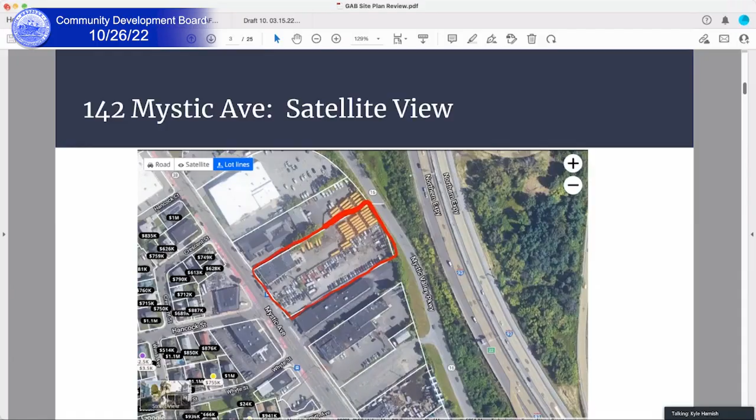This is the view from the rear, coming from 93. You can see the rectangle marking the perimeter of the lot. That building in front, the auto body shop, will be torn down and the rest of the lot will be cleared. As you can see, the lot is fairly level. In the back there you can see the school bus storage.

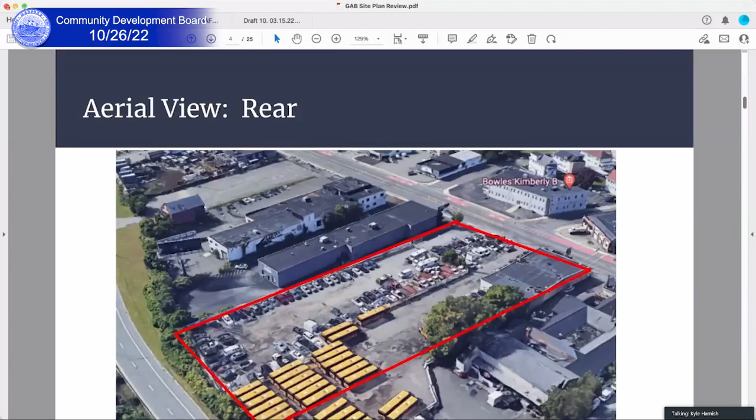From the front, this is the Mystic Ave view - again, very industrial, mainly car storage. Standing on Mystic Avenue, this front side elevation is what you're staring at day-to-day. It looks very industrial.

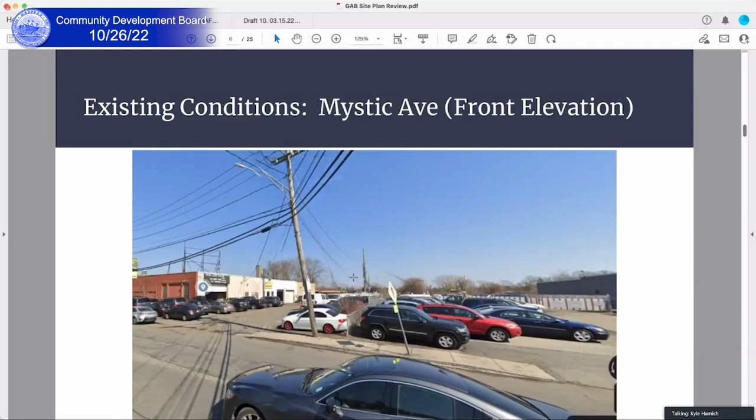You have that giant telephone pole in the way - not very exciting, not very inviting. Here's another view further up the street, looking back at the property. Again, very industrial, nothing inviting about this space. Certainly not a place I'd like to gather at night.

The whole genesis of this project is: how can we improve Mystic Avenue? Brian's had this vision from the beginning of what Mystic Ave could potentially be. It's a scary thought for our team and the individuals invested in this to be the first domino to fall, so to speak. We poured a lot of heart and energy into seeing this project beautify Mystic Avenue and be a catalyst for future development.

This is where we see the biggest change. On the left you see the existing site, and on the right the proposed one - obviously a dramatic change, much more inviting. I don't want to get too married to this exact image; it is a concept image. We're in development and our budgets are limited. We have a group of individuals who've committed their own capital and are very invested, but our budgets have limitations, so the renderings aren't exactly what they might be.

Those details will get fleshed out later in the design, build, and permitting phase of this project. But to give you an idea of the dramatic change we see happening on this specific parcel, this is meant to show you that.

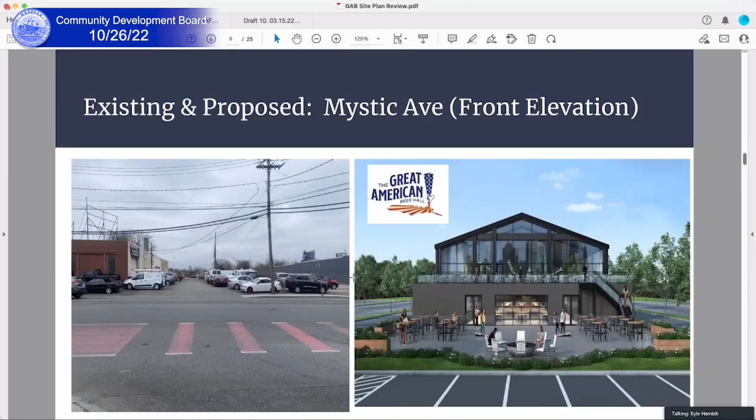Here's a more enlarged view of the front side elevation coming off Mystic Ave. The cars are gone, the bus is gone, the old dilapidated building is gone, and in its place a much more inviting social space that we think can be the hub for Mystic Ave and hopefully, as mentioned, spur future development on the street.

The front side elevation for us has to be inviting - it has to have some green space. We heard you loud and clear at the last meeting and have done our best to increase the landscaped area of this lot. We want the experience here to not feel like you're on an industrial lot, but rather like people are escaping into this development and building. It should be an experience for visitors and customers alike, and a buffer of landscaping and inviting nature toward the building will accomplish that.

Now, this is the side view. I know it's drawn some concerns from board members, and I understand that because of the massing of the project, it looks very large. We have windows along the top part here and a roof deck, which is nice. There's a lot of surface area on the lower half without much glazing, because a lot of our concessions are located on that wall, so there's really no use for windows there.

Don't want people peeking in behind the bars and behind the concession stands and whatnot. But we do have plans and ideas that we've shared with our architect already to perhaps grow some sort of green wall here, planting wall, some sort of signage to beautify that front entrance and space and make it more welcoming, and also to direct traffic to our main entrance.

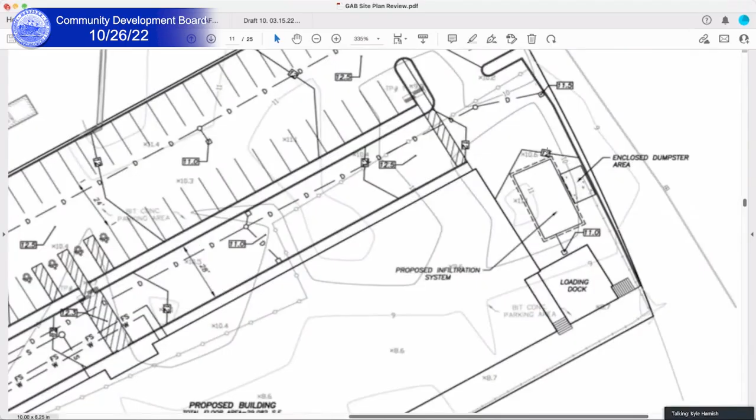At the rear, almost facing 93, you have grade 12. So that's elevation 12 at the rear. And if we look at the front, which is on Mystic Ave coming in, you have a 10 coming off the curb, and then you're up to an 11. So you're talking a 1 to 2 foot pitch over 400 feet, a very level lot. Certainly something that, as a builder, I love to see. Not a tremendous amount of challenges in a level lot.

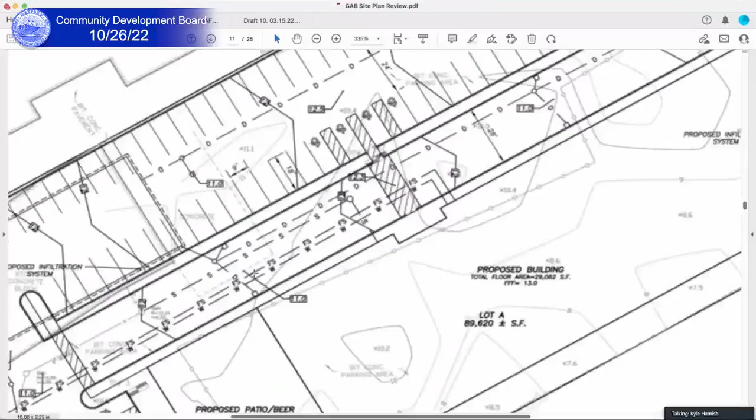Sorry, I don't know why it did that. Let me go back. Forgive me, sorry, trying to go back to that. There we go.

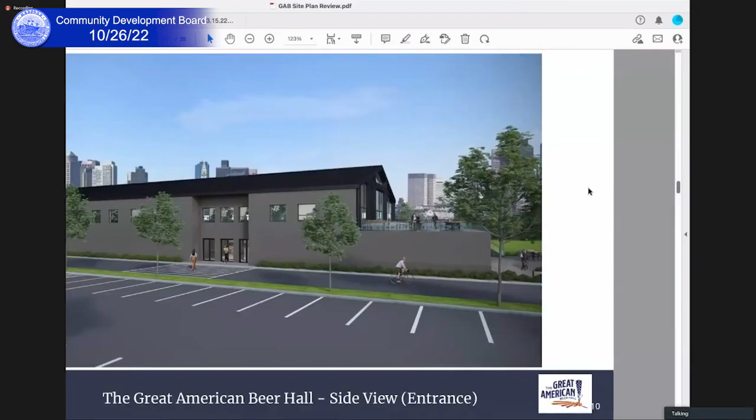So a couple things with the site plan that you'll see here that you won't see on our landscape plan: these dotted lines at the front of the parking lot. That's a proposed infiltration system, essentially a stormwater management system. This is where our drainage will go. So the parking lot, you'll see, is at 12 and a half at the top, goes down to 11, and then pitches all the way down. You essentially send all the water down to this infiltration system here.

And then there's another infiltration system in the back by the loading dock, and that is to send the water down this way. So those are our stormwater management systems that have been looked at and are being worked out with our civil engineering team and the City of Medford Engineering Department. We will get calcs on all that, but it's basically the surface area that is out there and how much water management we need to calculate. So that hopefully answers questions on whether or not the lot is level.

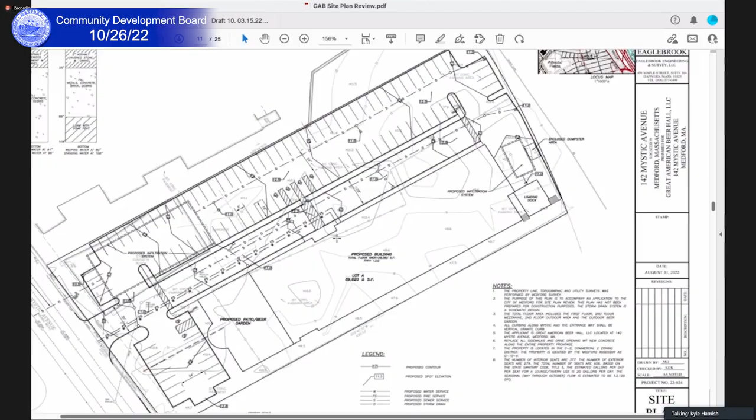It certainly is. You can also see here the utilities coming off Mystic Ave, outlined here, that go into our buildings—gas, water, sewer, drain, and underground electric. It is our intention to get everything underground. There is an electric pole at the front of this property right on Mystic Ave that is owned by the utility company, and we will do everything in our power to hopefully get that pole removed and get a transformer put somewhere on the landscape buffer area. No guarantees there, but it's something I am looking into, and hopefully can get either Eversource, National Grid, whoever manages and maintains that pole, to work with us so that all the utilities are underground. I just think it makes for better development, and you don't have to stare at a pole right in front of the building. So that's the site overall.

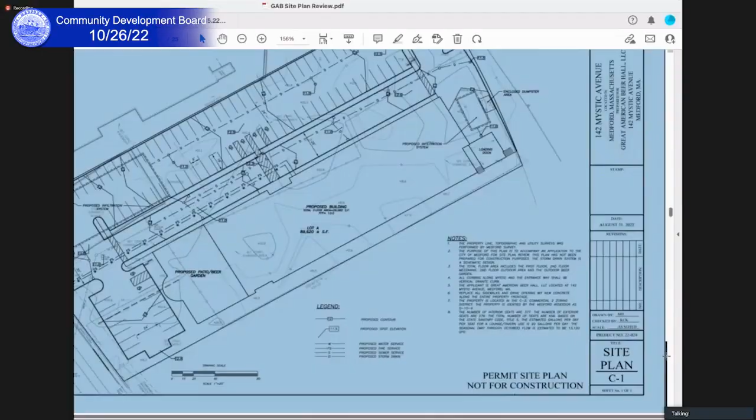Now I'll get into the revised plan here. Backed me out of this. Okay, so, sorry. You had it there for a second. Yeah, I don't know why it's not letting me scroll as it once was. Let me try to enlarge it for you. Forgive me if I'm taking extra time.

Okay, so here is the revised landscape plan, and I worked on this basically to answer most of the questions that were brought about in the last preliminary hearing, and also upon receiving all the letters from the Medford Fire Department, the Public Works Department, the Engineering Department, and the Traffic Department. So we worked on this pretty diligently, and forgive us, we do have budget constraints—this isn't some high level architectural rendering.

So we're doing the best we can, but when it comes to the actual permitting phase, you'll get much better and clearer images and renderings. But I think it still communicates our message and hopefully highlights some of the areas of concern.

Everything was designed here per city ordinance 6.3, which was provided by the planning department office. Alicia and Victor were kind enough to send me some of that information, and I reviewed it to the best of my ability and included all those measures here.

So just to give you an overall idea of the lot size and how much we're covering, I wanted to show you this legend for the zoning requirements. This is commercial C2, and basically what's required of us is 35 feet of frontage.

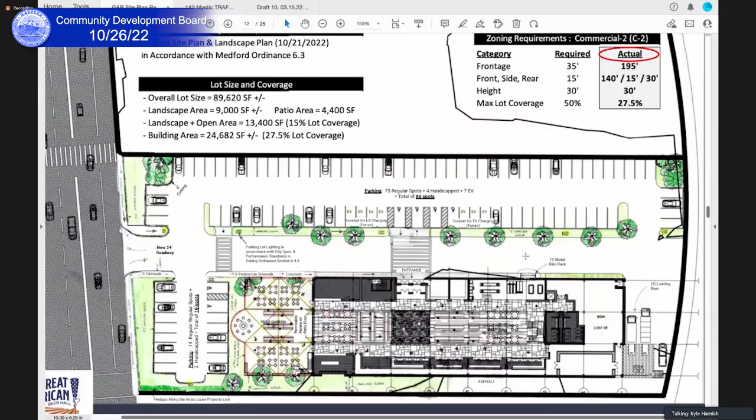Bike rack was mentioned at the last meeting. We have a 15-foot metal bike rack included at the front side of the building over here. We put it further back on the property just to hopefully deter any theft or anything like that.

We also have 2 loading bays at the back of the property that was brought about by one of the departments. And then we've clearly identified our entrances. We've opened up our landscape buffer area to show the flow of traffic going to the parking lots and how those concrete sidewalks are going to work.

So I think overall, that is essentially the changes that were made on our behalf, and hopefully answering a lot of the questions and concerns from the board on the last meeting, and certainly all the letters we received from the various departments. One thing I want to bring attention to from one of the departments was the traffic department. We understand that the traffic study that was provided is lacking in some areas, and the traffic department director suggested some mitigation efforts to help us get where we need to be.

I think our team is committed to doing our best effort in working with the town and the city to achieve those mitigation efforts. He provided essentially 2 pathways.

Not sure if everybody read the report, but the first of which, mitigation efforts are mainly using Mass DOT, because that road, Mystic Ave, is a Mass DOT road. So we would have to engage with them and offer some ideas in mitigating the traffic flow to our site.

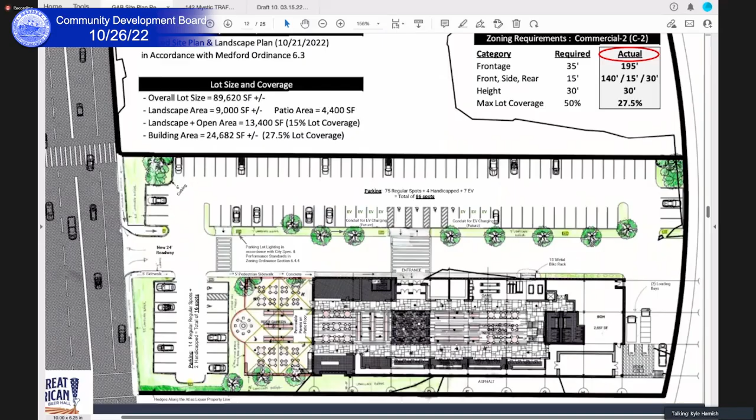Other than that, I don't see anything that came about from the various boards or departments that we are not able to answer or flush out, either in this meeting or regarding the stormwater questions that came from the engineering office. Those are all being worked on by our civil engineering team. And obviously, when we go for permitting, stormwater permits are required, so we won't be able to do anything without those permits in place, irregardless. So I think we've sufficiently answered most of those questions.

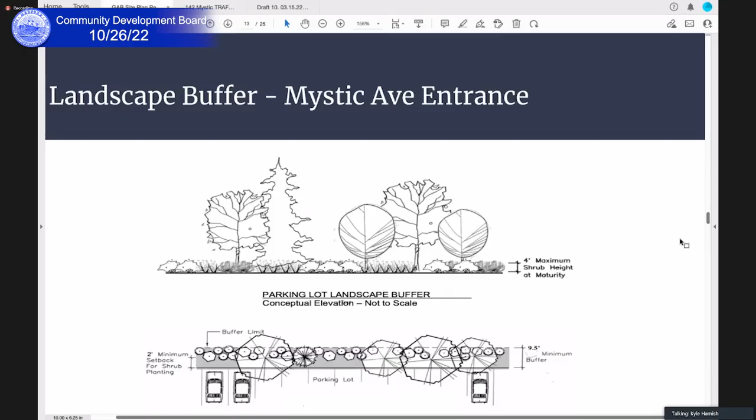Let's go to the next slide here.

Okay, so again, this is your front view. What I want to talk about next is the overall design and aesthetic of this building. I hope the board understands this - like I've mentioned several times before, there are budget constraints in this project. We've already done a lot and paid a lot of money to get to this point, and without knowing that we're actually going to build this thing, it's hard to commit more capital to have the full architectural plan done. So at this point, this is the best that I think we can provide to the board to give you an idea of what we're trying to build.

I have some slides to show you some metal prefab buildings that I think are successful and how they've been built in other areas of the country - good examples of what we're trying to do. A key factor to our building is the prefab metal. The reason for that is twofold. One, cost - keep our costs down. Two, speed - we want to open this as soon as possible, and we are committed to doing so. The big reason is construction costs are constantly fluctuating. Since the pandemic, in this field and industry, it's been very difficult to gauge pricing, and almost everything you put out to bid comes back over budget. So you're constantly trying to value engineer and source materials from different areas. So something that might be visual to you today on this board might not be available to us - we're just trying to give you a concept image of what we're trying to achieve. I think the other buildings I show you will be helpful in gaining perspective of where we're coming from.

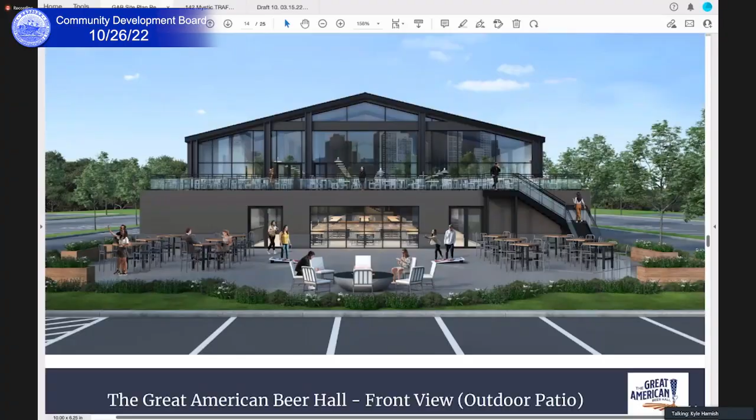Why don't I go back? Sorry - let me go down to the other view.

Why does it keep going back to that? Sorry.

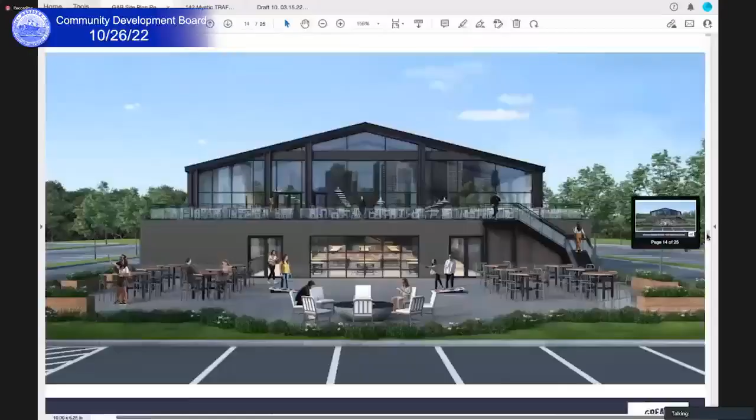So this is the building. Again, low pitched roof. You can see they have solar on top, which we intend to do. HVAC mechanicals are on top. They obviously have some outside dining. They're on a main road.

If you look at more recent images of this property, they have this landscape buffer here. It's very narrow. Ours is bigger, but these have grown into some vines, and so they've shielded some of that metal, corrugated metal paneling with some landscape screens, which I think is a real nice detail. They have some plantings in the front. This just shows you a real world example.

I'll give you one more. This is Surly Brewing, a metal prefab building. Again, look at the roof pitch, very similar to ours. This has some second floor mezzanine, obviously some indoor outdoor feel, and a fire pit in the front.

This is essentially trying to give you some idea of our job to create an experience for our customers. I think that indoor outdoor feel is going to be instrumental in our success, so any areas we can do that, we're going to. Mainly our strong point is on the Mystic Ave elevation and that front beer garden. We're going to do the best we can to keep it open, keep it airy.

Obviously, being in New England, we have challenges with weather, so a good part of the year we won't be open out there. But it's in our best interest to introduce as much glass as possible and create that flow indoor and outdoor. So those are three real world examples of metal prefab buildings.

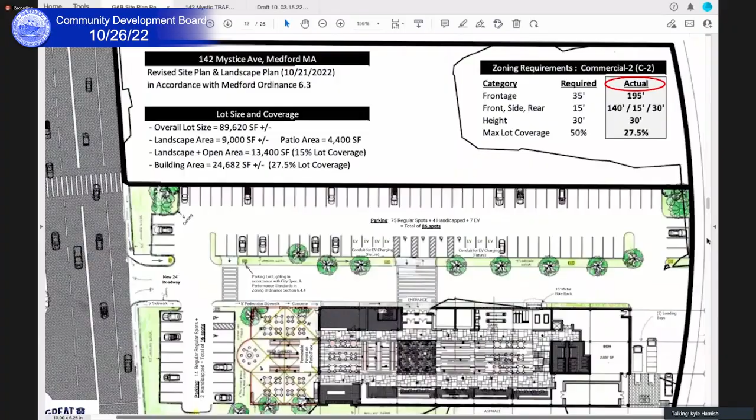This is just to give you an indication of what the inside is going to be. Large gathering spaces down the center of the beer hall, concessions on the outside, beer garden at the front, and then additional taps on the other side of the building, and bathrooms at the rear.

And then we're going to have some form of second floor mezzanine, great for private events and maybe some offices, ADA accessible bathrooms. We have an elevator and then a roof deck off the front.

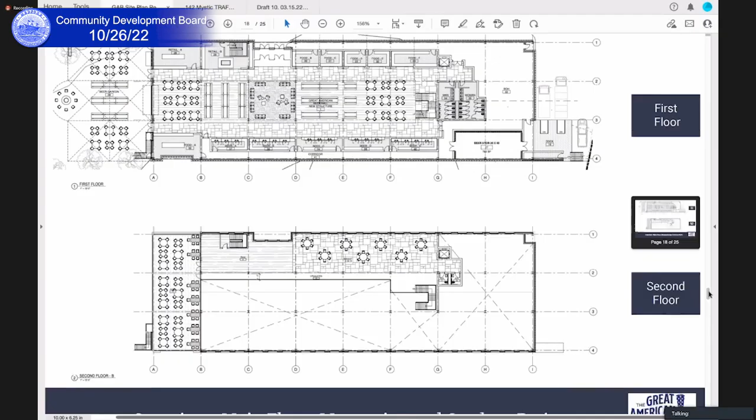It's just to show you that people are congregated in a social setting in the middle of this building with a lot of glass, trying to feel escaped from the city and the hustle and bustle of Mystic Ave. The idea is to create an environment inviting inside as well as outside.

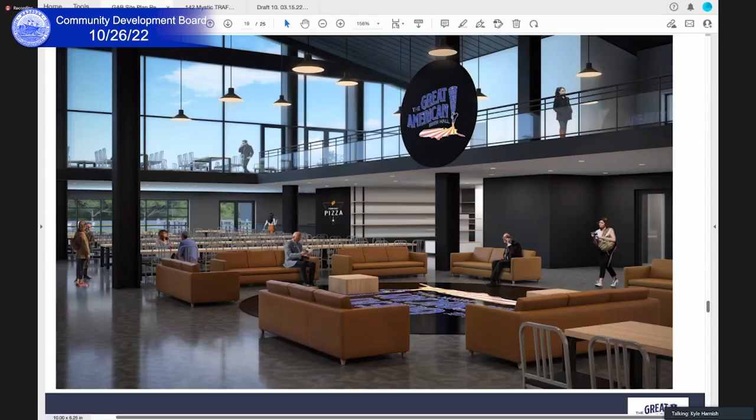Show you another view. This just shows you some of the beer vending stations down below. This is looking up from the mezzanine level, some form of television for sporting events, things of that nature. And one last view just shows you some seating.

This is not the set of chairs we particularly have or the tables. It's just to give you this communal aspect of bringing people together. That's kind of what our motto is, best brought together, and we feel that this beer hall can certainly achieve that. We're doing the best we can to make it an inviting space that people want to gather both inside and out.

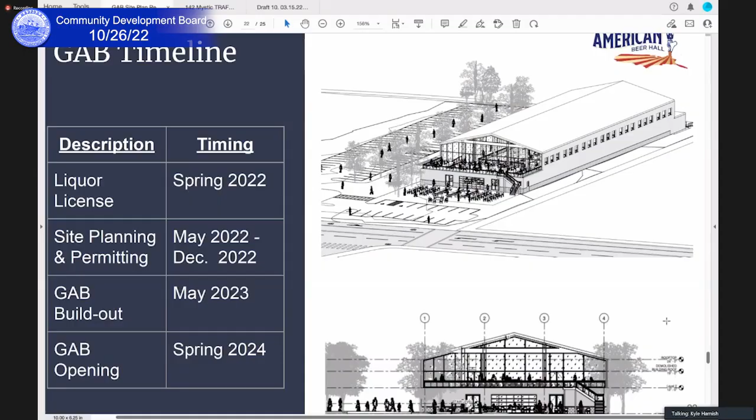So to wrap this up, I wanted to give you a timeline on where we're at and how this project has come to date. We've applied for our liquor license, so we're still awaiting that. Site planning and permitting, we hope to get through as soon as possible.

There are time constraints, not only on our capital. We are being funded by Capital One through an SBA loan, and we have capital requirements and commitments that have certain deadlines to them. We are running low on that timeline, and I think Brian has clearly communicated it from the beginning.

His family, who owns and manages the property, they have tenants and need to give them forewarning, and there are leases and things of that nature coming up to expire. So it is certainly a critical path for us. We are at that juncture right now and need to move things along as best as possible. Our team is committed to doing it. We just hope the board sees it the same way in assisting us—we understand there are multiple steps still to be had.

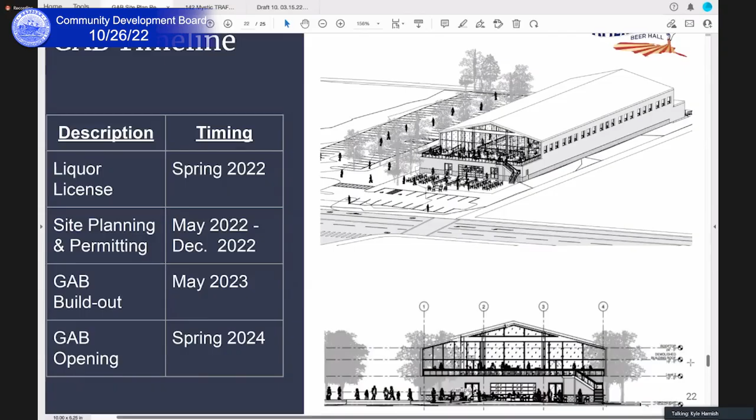But this is one critical and important step that can get us on the right path. Again, I mentioned time, speed. The metal prefab buildings, we can move fast, and it is in our intention completely to move fast. So if we can get swift approvals and permitting going as soon as possible, we will intend to build in the spring, in May of 2023, and hopefully have one year of building and be open by spring 2024. So that's what our team is committed to. And I hope with the help of this board that you guys will see it the same way as we do, and doing everything we can to improve Mystic Ave and make it a place for people to want to be, and hopefully spur future development on this street.

So I'm open to any questions from anybody. I hope I didn't take too much of your time. No, we appreciate the presentation, Mr. Harnish. Appreciate that very much.

Thanks for the additional details and materials you provided to us. Let me, just following our regular agenda, invite any city staff who might be here who would like to speak or address the project before we go further. Amanda, any folks out there? No one from that I know of, unless Victor or Alicia have something they want to add at this time. And they don't have to. Just an invite. Thank you.

I think it would be good to hear from the board. We have been working with the applicant to try and make sure that they could respond to everything that the city is looking for in a presentation like this. We're excited to be working with a smaller company and local residents, and not a large international firm that's coming in and putting this in Medford, but rather somebody who's from the community trying to develop something for the community. And I just want to acknowledge that, because I know they keep saying like on a shoestring, tight, but that is, we're working with community members here to develop something for the community, which does in fact have a lower level of initial investment than some of the larger projects that have come before you recently. And we thank them for having extra meetings with us as well.

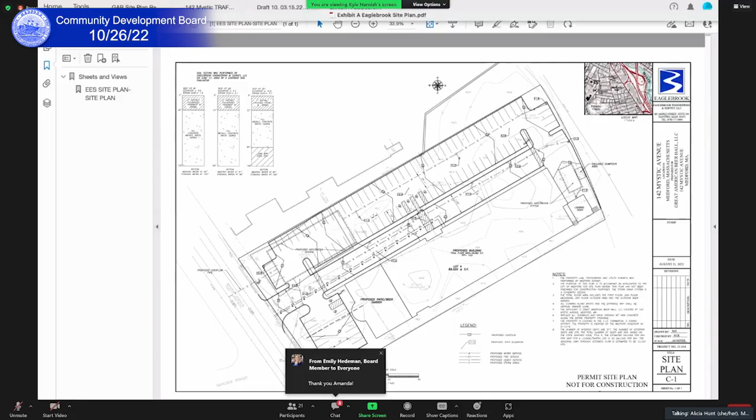Actually, the part about a site plan prepared by a registered architect or professional engineer is that document with the elevations and everything, the easements, the right-of-ways, existing contours. That's 11.7.7 of the document. I see that, thank you.

Lighting, they then actually supplemented that, and some of those items on here, landscape and screening, is on the additional document they prepared, the one that's colored in.

And I believe they provided a written list in the packet. There is... I'm going back and... a list of site plan updates.

That list was provided to you in writing. And so it is extremely simple to say that the list of site plan updates in the letter dated October 21st, 2022 would be incorporated as each of these is a condition. Before a building permit shall be issued, there should be a plan provided to the building department reflecting each of the 15 items on this list.

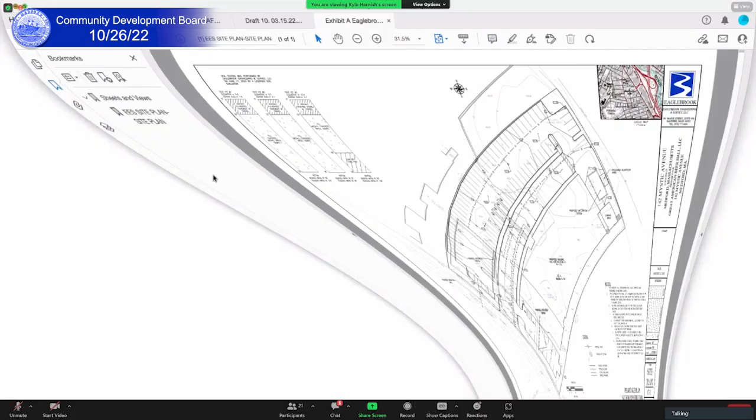What I was going to say earlier is I think what would help me is to get the engineer that drew this plan, and the traffic engineer who did the study, on the call with us—that would really help, because it would help us understand what they were thinking. I'm looking at the entrance to the building, to the parking lot, and it's just off-center from an opposing road. We talked about this for hours on that other project Alicia just mentioned, and I want to hear the traffic engineer say that's okay.

You drew a 5-foot sidewalk from the street to your front door, which is really narrow and not welcoming at all. I want to hear the guy who did the layout of the site tell us why that's okay from a pedestrian circulation standpoint.

There's just a lot of things. The front parking lot is a dead end. What's going to happen when three cars are in that space? It's going to be a mess.

There are just things I mentioned this last time. You're parking right up against the fence, the neighbor's fence, without any kind of buffering. Is that really best practice?

I don't know. I think there are things that are making us uncomfortable. Are you talking about the neighbor on the 134 Mystic side? To the north, we own that property as well.

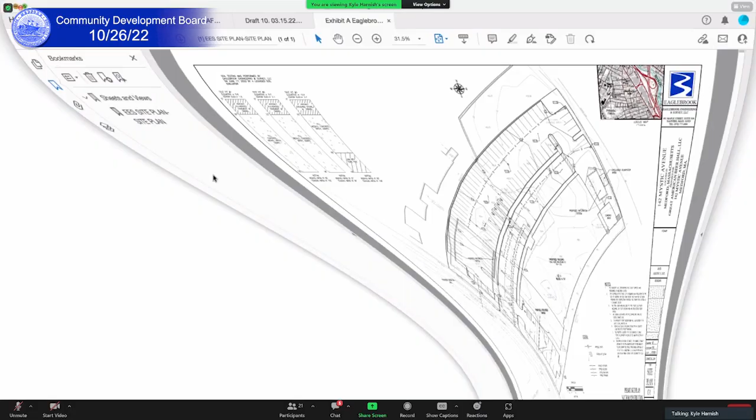It looks weird on our end, it's disconcerting. Kyle, it's on your screen. It like froze. Oh, it says screen sharing is paused. Sorry, there you go.

Do we actually have, like, can we give those as, is that our job? What is our job? Well, we usually do give those comments and we go back and forth, and that's how it works. But what do we have to?

If you wanted to say we're not comfortable - honestly, I didn't check if the zoning allows the parking lot to be right up against the line. It does say something about needing screening between your parking and the neighbors.

If you said we agree that the drive aisle should be narrower, but don't make the island in the middle bigger, pull it away from your neighbor and put screening along your neighbor - that's something you can do.

It's also reasonable for them to come back and say, actually we own that property and we'd prefer to have it right up against it. It's a little weird that they would want that, but they could.

But those specific things are the kinds of things that this board usually says - I'd like to see this walking path, I don't see the bike racks.

And if he had said to you, tell me what changes you want, I'm going to go make the changes and come back to you in two weeks, then you would have started saying here are the changes that we want to see. That is what this board typically does.

And I'm saying that some of - Emily and George are relatively new to this. Is it possible for us just to list? I mean, I know this isn't what we want to do, but we also don't want to put a knife into this project.